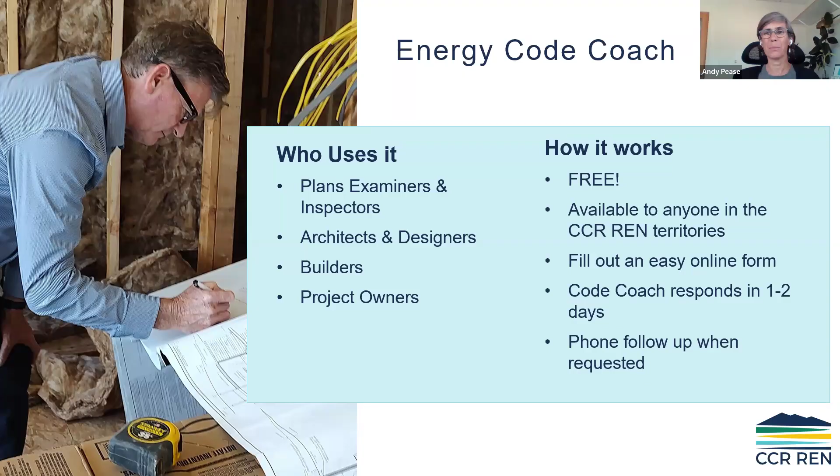Today's learning objectives are all about CALGreen, residential and non-residential. We're going to go through the whole thing in an hour and a half, covering mandatory measures, a little bit about Tier 1, Tier 2, and both submitting and reviewing compliance. Today's session is worth 1.5 learning units, either for ICC or AIA. And if you're a licensed architect looking for a zero net carbon design credit, the content of today's class will meet that requirement as well. At the end, we'll provide an email where you can request a certificate for that.

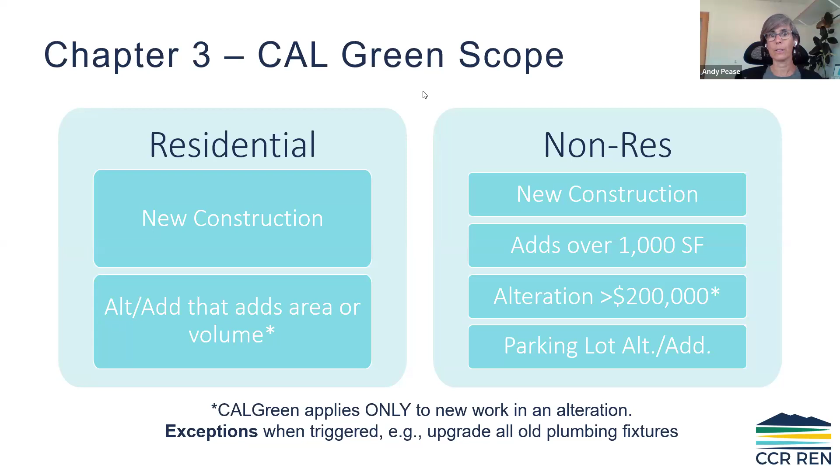And then parking lot alterations and additions will also trigger CalGreen, as we'll look at when we get to EV charging.

Also within chapter 3, in terms of scope, is this mixed occupancy. Residential needs to comply with its section, non-res with its section. So for mixed use buildings, we submit 2 checklists, one for each section. If you're doing an apartment multifamily building and there's a community room that's just for the residents, that stays within the residential scope. But if you do have a restaurant or store on the ground floor and then residential above, you'll need 2 checklists.

Same with phased projects — you need to be aware of what's in the scope of work within that project. For a shell building, the initial TI will have to follow the new construction rules. The second TI counts as an alteration, so that 1,000 square feet and $200,000 limits will apply to that.

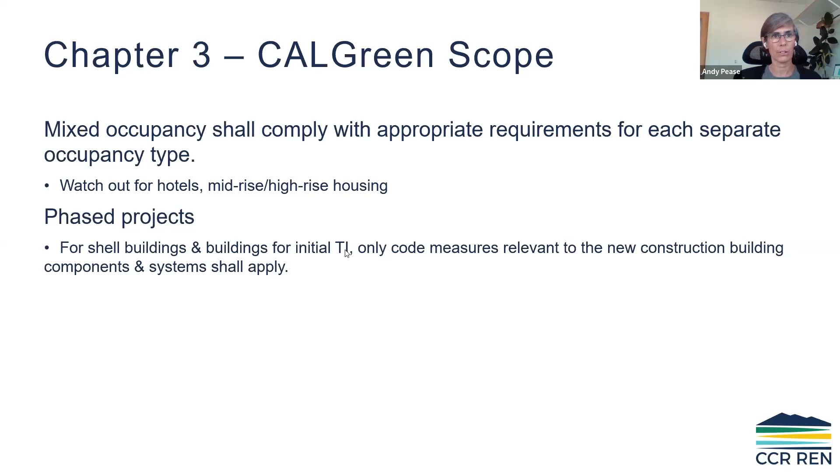The macro process of showing CALGreen compliance is that you should have a CALGreen checklist. Either you can have an Excel document that has all the code sections and that gets put onto your plan sheets, or the AIA California has this handy plan. It's a great worksheet, and they update it for every code cycle.

Now we're going to launch into mandatory measures. We're going to walk through each of these divisions: planning and design, energy, water, materials, and environmental quality. These divisions are grouped together - division 4 is for residential and 5 is non-residential. But there's so many parallels as we walk through, we're going to list them all at the same time, kind of in sequential order. We'll show the code reference section in the bottom right so you can go back and look at it yourself. And if we have notes on documentation, we'll provide those in the gray boxes.

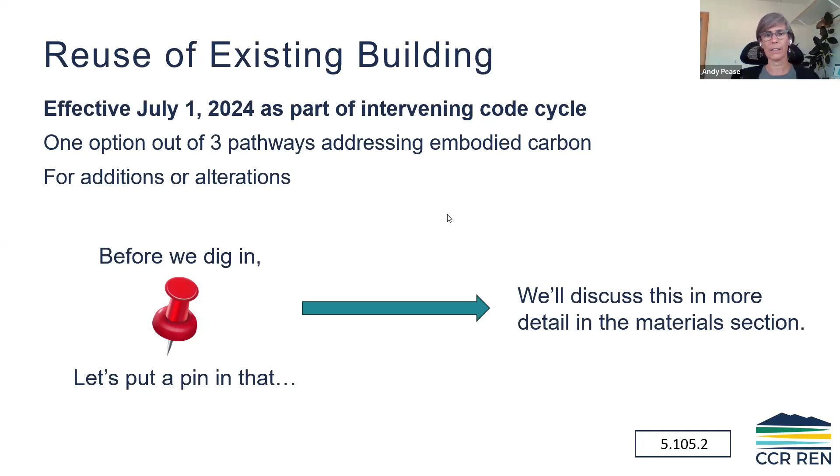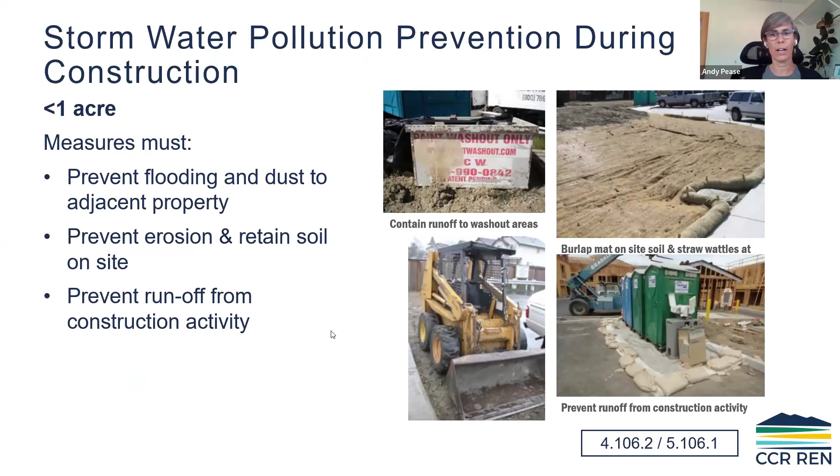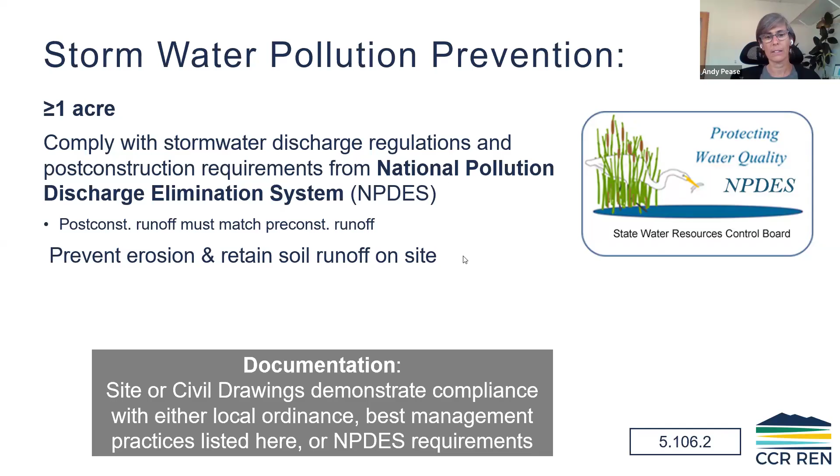Stormwater pollution prevention during construction: if it's less than an acre, CALGreen has the specific normal controls that you'd want in terms of dust and erosion and those types of strategies. So it's good to have a place to put those things. And if you're over an acre or more, then you're going into the NPDES system, which has its own rigorous program for that - making sure the site or civil drawings have either the local ordinance, the best management practices, or the requirements of the larger program.

Grading and paving - not surprisingly, we want to slope the pavement away from the building. This photo on the left shows some low impact development, which is a good strategy to manage the drainage once it's away from your building. But the mandatory part is the actual sloping away from the buildings, and that should be shown on the flat work plans. If you're not altering the site itself, then you don't have to abide by that requirement.

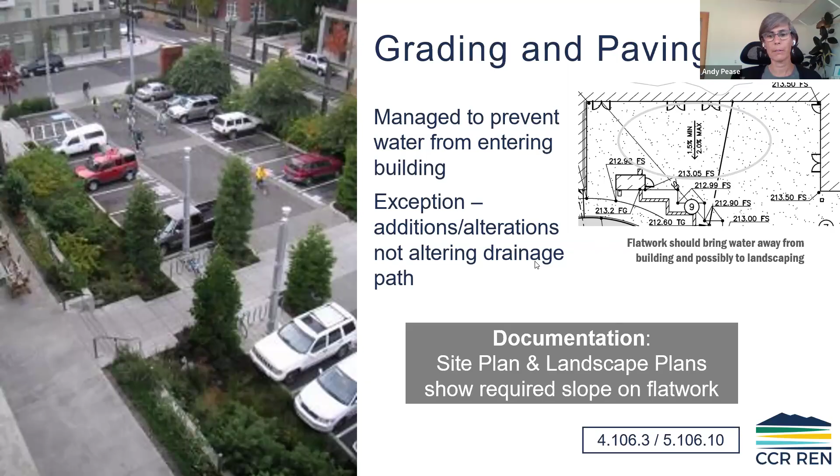Into bicycle parking - in the current code cycle 2022, bike parking only applies to non-residential projects. There's short-term bike parking: it needs permanent racks within 200 feet of the visitor's entrance. So if I'm biking to a store or office building, I want to park my bike close to the front entrance, do my shopping and be on my way. The current code has this listed in proportion to how many car parking spaces you have, which is kind of problematic - if you just have a lot with 40 cars, how many are employee or how many are visitors? We actually end up having that improved in the next code cycle.

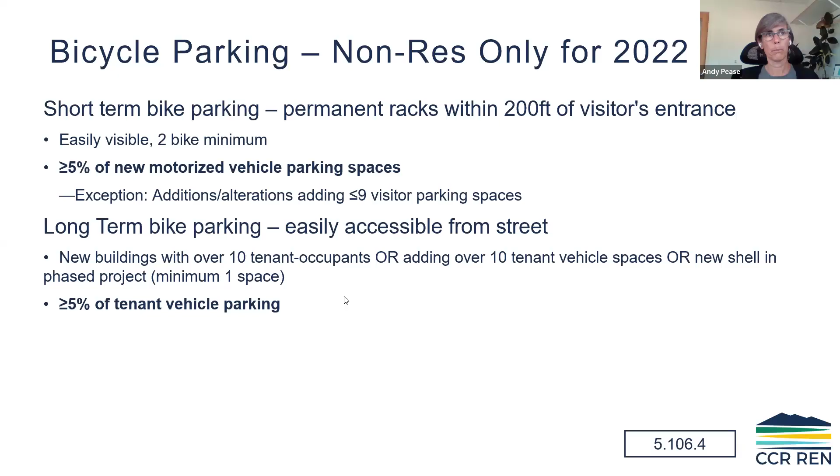So long-term bike parking, again non-res only, is related to your tenant occupants, and we're looking for long-term bicycle storage - a safe place to leave your bike for an 8-hour work shift or whatever.

Here's what's new for 2025. We'll try to highlight these as we go so that in January 2026, when this takes effect, you'll be ready. Short-term bike parking is now 20% of peak daily visitors - so however many visitors you expect at your peak, say 20 people at your store, you'll need 4 bike racks out front in a convenient way. Like long-term parking, it should be easy for employees to get there from the street without dragging bikes up a set of stairs. It's now a percentage of tenant occupants, meaning employees who will be in there. Tenant occupants could also include permanent volunteers or folks who will be there longer than a shift.

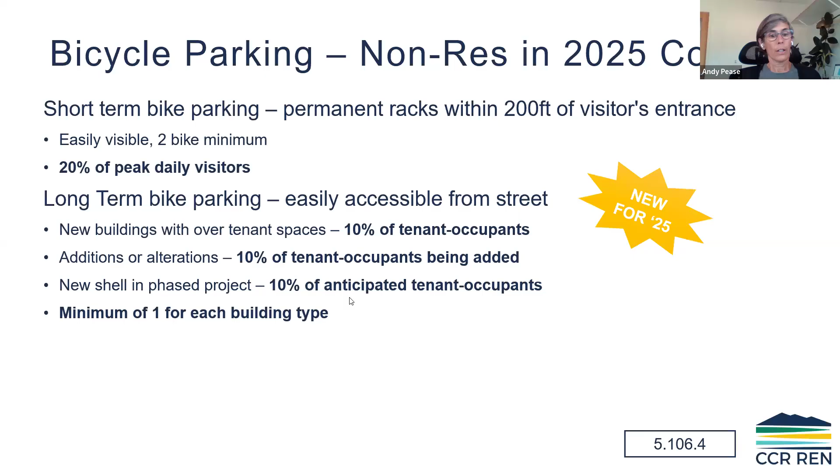And a minimum of 1 for each building type. Also new for the 2025 code cycle is residential parking, which I'm super excited about. A lot of cities have done this as an additional local requirement, so if you have multifamily housing or hotels and motels, you need visitor racks so people can bike and visit friends, or long-term biking for residents who have a bike. It's 1 bike space for every 2 dwelling units, so not a ton, but it'll make a significant difference. Hotels and motels is based on square footage with a minimum of 2 spaces.

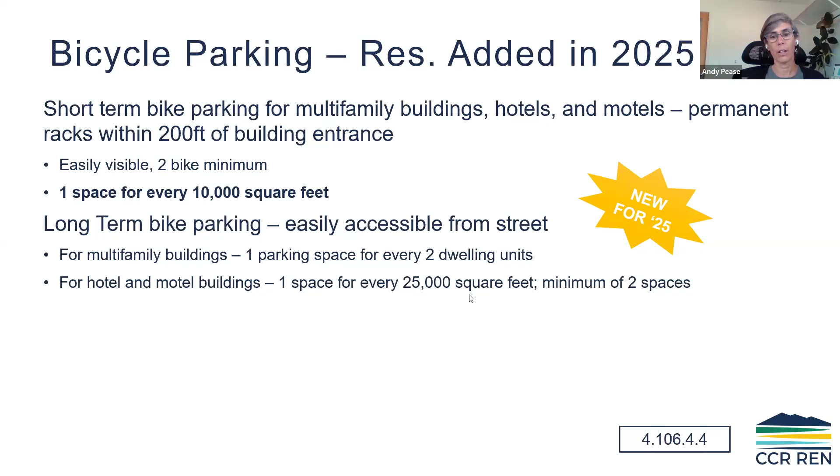Bike parking continues - that was already in place for public schools and community colleges. Overall, you should show the bike racks on your site plans, whether landscape or civil, usually both. But the calculation should be on the cover sheet so the plans examiner and building inspector are in agreement with the calculation, especially now that it's not based on a number of parking spaces. We'll make sure that's covered.

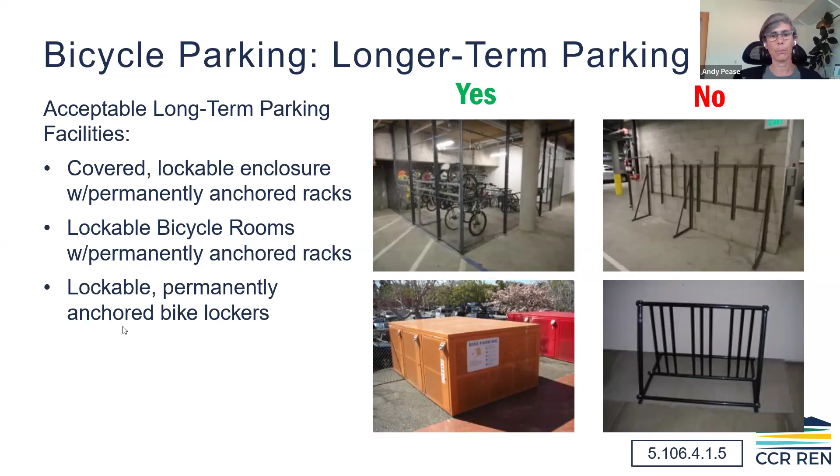So what does long-term bike parking look like? It can look like these lockers - there's a whole variety of what that looks like. You can have a bike cage in the parking structure. This one on the right is out in the open, and you'd need to clarify if it's easy to use or not. The one on the bottom right isn't acceptable because it's not mounted - it's just sitting there, so somebody could lift up the whole thing and walk off with it.

One question really quick, Andy. Sure - Eric asked how peak daily visitors are to be determined at plan review.

Great question. We use LEED certification as a model for a lot of these open-ended cases where it doesn't necessarily define things. So if it's a retail store, for example, or an office application, peak visitors might be - do we have a conference room where visitors from outside the office would be? Sometimes peak visitors is 4, for something really small like an office. Retail might have peak visitors of 40 people wandering around the store. So it's a judgment call based on the actual use being permitted. If it's a TI and it's just the shell, that's trickier - you make judgment calls, and once the TI happens, they might actually need to add bike racks to be appropriate for that. Thanks.

All right, now we're going into the electric vehicle charging section. Just in this current code cycle and upcoming in the new one, there have been a lot of changes. We're going to spend some time talking about the definitions, then the applicable requirements for single family, multifamily, non-res, and commercial heavy duty truck charging, getting ready for that, and then what applies to additions and alterations.

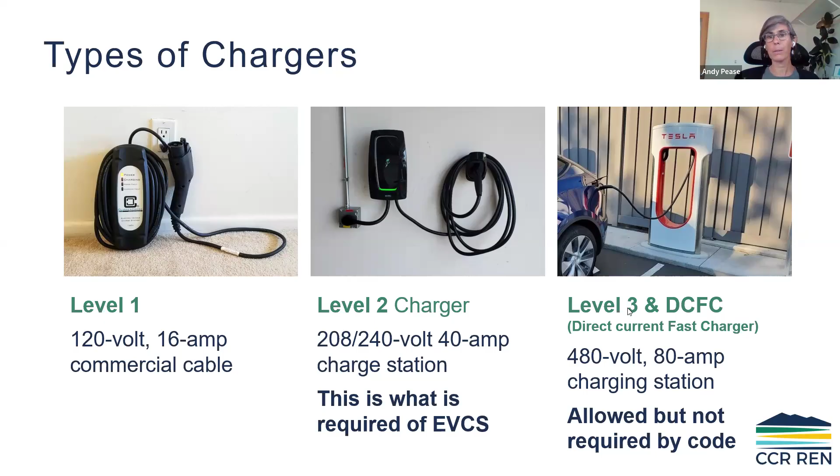Within these types of chargers, level 1 is just the little device for the car and an outlet. Level 2 charger, which is an electric vehicle charging station, meets that requirement, and it could be wall mounted or stationary. Level 3 are the direct current fast chargers, typically the Tesla type, and they're allowed, but they are not required by code at all, ever.

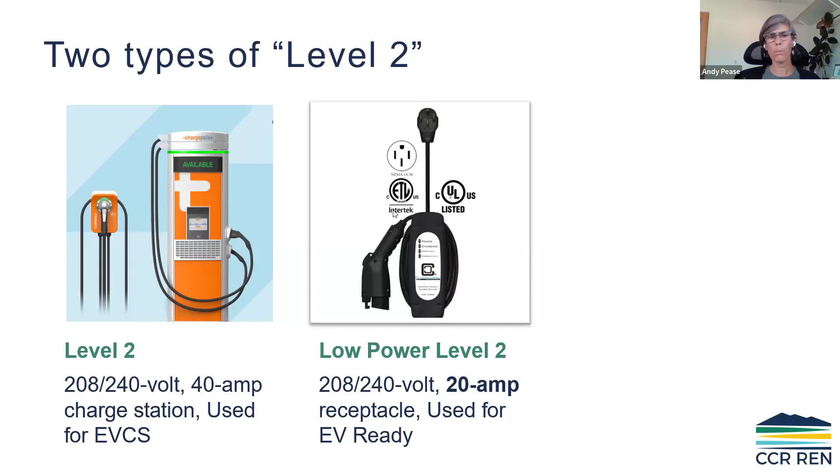So in terms of the 2 types of level 2, there's the level 2 where it's kind of like one of these ones that you might see at a supermarket that you can go and charge your car when you're on a road trip, or it could be a smaller device back at your apartment complex or something like that. But there's also a low power level 2, and that is a 20 amp, and it goes to a receptacle, which is super useful, and we're seeing it show up.

The interesting thing is that the market, capitalism, brings something new to bear for that. So there are now opportunities for even an outlet to have a cost recovery opportunity, because otherwise it's problematic if you're providing a gazillion outlets for your project and don't have a way to make people pay for that electricity.

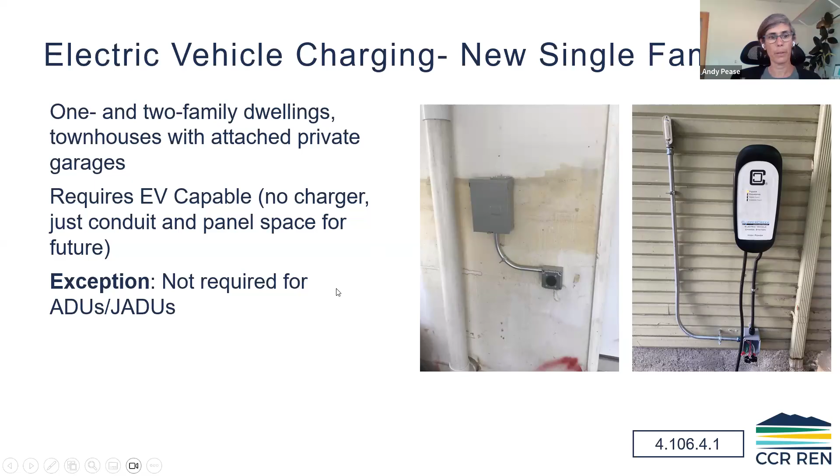So those are kind of the definitions, the scope of what we're looking at in new single family construction. If they have their own garage, then they just need to be EV capable - that's the one that just has conduit, no charger, no wiring, just electrical panel space and the conduit. ADUs and JADUs are not required to provide that, so if that's the addition or new construction, by state law they're exempt.

As a side note for the future, versus installed in a commercial setting or even in a residential setting, it's important that things have labels. So the breaker itself, the panel space should have a label, and the stub up, if you have that, should also be labeled for future EV. But don't label the parking space because there's no actual equipment there yet. And then once it's installed, you should label the parking spaces that they're for EV charging only, if that's the case.

Multifamily, hotel, motel - there's a lot of hubbub in July when the intervening code cycle really increased the requirements there. So hotel and multifamily currently require 40% of all the parking spaces to be level 2 EV charging receptacles. 40%, wow. And another 10% need to actually have level 2 EV chargers. It's a lot, but again, it's an equity thing - you have folks who are living in apartment buildings and have no way to be able to charge their electric vehicles.

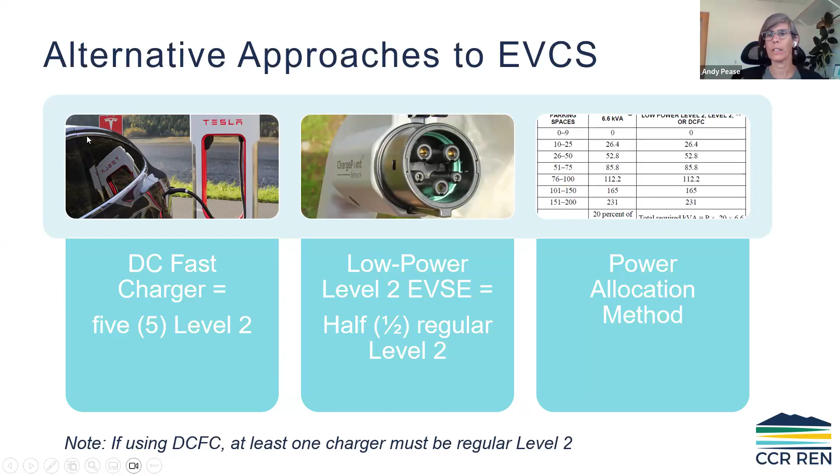You can also go slower, so you can have more spaces that are lower power, like if you just don't have the amperage, but then you need twice as many. There's also a power allocation method. I personally haven't used this yet, but it's a way where you can kind of adapt to what's emerging on the market.

Accessibility has some overlap, of course, with electric vehicle charging. So for the EV charging stations that are non-residential uses, or motels, public housing, they just comply with Chapter 11B, and there's clear language about that in terms of clear space, etc. Note that if you're putting in charging stations, at least one needs to be van accessible, but that charging station van accessible space doesn't count for the accessible space for the project overall. So you have to add additional EV accessible parking spaces.

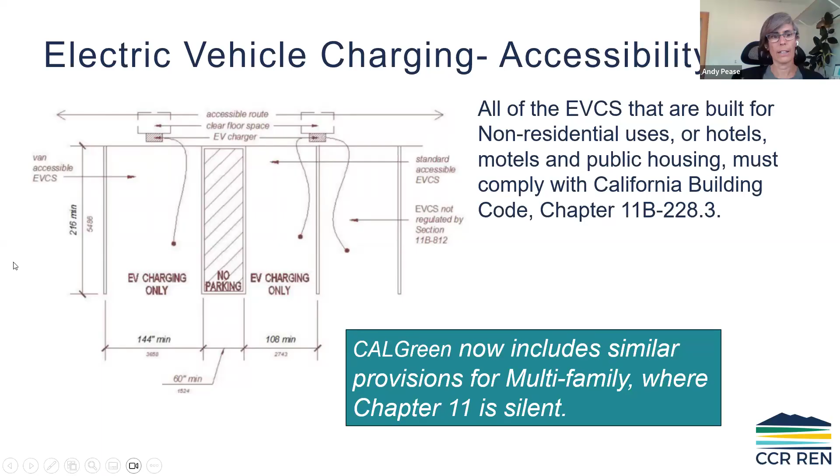In the last code cycle, they also added accessibility for multifamily. Chapter 11 is silent on that—I guess that's 11A. CalGreen now has a section that shows you need to have the 5-foot or the 8-foot aisle in between, depending on the width of the space. So similar on all of that.

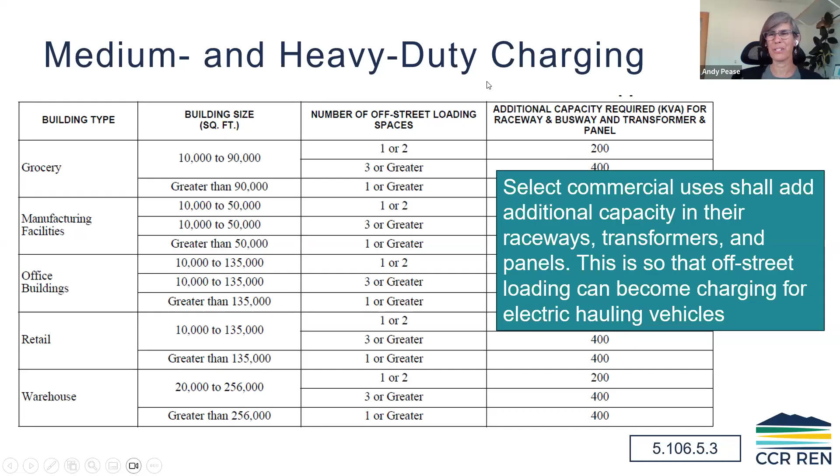All right, and then kind of wrapping up the charging section here. First, heads up that for medium and heavy duty charging, we're trying to have select commercial uses—grocery stores, manufacturing, office, retail, warehouse—depending on the size and the kind of loading spaces that are off street, need to have capacity for future charging. So it's more about making sure that you have the electricity and the raceway there, but you don't have to have the charging equipment at this time. Of course, you can kind of read the room about what we'll see in future cycles.

Charging at public schools, community colleges—they have a similar table approach, but just different numbers. And there's no changes to that in the next code cycle.

In this 2024 intervening code cycle, there was an addition for parking lot additions and alterations—maybe that was just new to the 2022 code cycle. So they figure if you're tearing up a parking lot to add lighting, or doing a major alteration to the parking lot, or a new addition to a parking lot, that would be a good time to add EV charging capacity. In the current code cycle, it's 10% of spaces that are added or altered must be EV ready. But in 2025, basically everything that's new or altered must be EV ready or EVCS—instead of 10%, it's kind of all of them, up until what would be for new construction, if it's oversized.

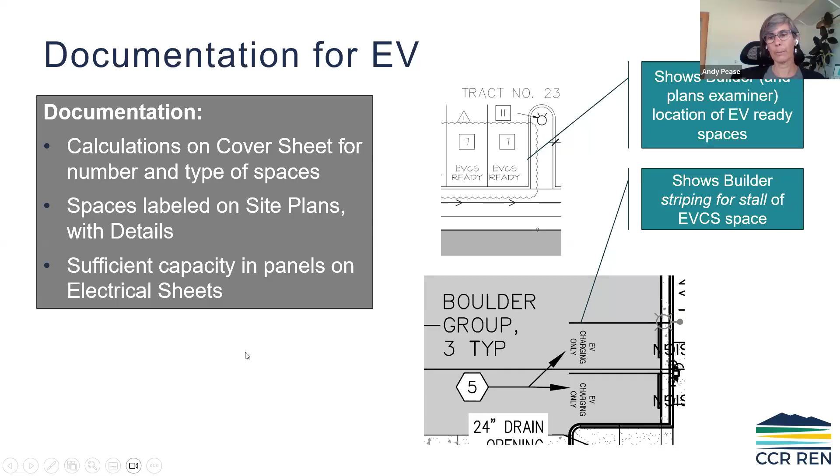And then documentation for EVs—again, we try to work with architects to make the drawings a little user-friendly, both for the jurisdiction and for the builder. So if you're showing an EVCS, this is a ready spot that you show it on here, that helps the plans examiner see what that's going to be. But if you're actually showing the striping, then that helps the builder know what the striping is. And so you should have the calculations on the cover sheet and make sure that there's alignment with the electrical plans.

All right, so how are we doing, Tatiana? We have one question, you may have answered part of it on the alteration slide. It asks: could you please re-explain when these CALGreen measures apply to a TI? For example, a retail shell TI requires updated bicycle parking per CALGreen, even though there's no change in use. What about EV charging? Will that be required for a TI, or only if the parking lot is altered?

Yeah, great question, and there is some subtlety there. For one, if it's the initial TI, that counts as new construction. What we've seen, unfortunately, is that somebody will do the building shell and say, well, we don't know what the uses are, so they don't necessarily put in the site improvements that are going to be needed. I don't think it's appropriate to let that slide so that the TI person comes in and there's no charging infrastructure. That's probably why the initial CalGreen requirement was based on the number of parking spots, because then it was tied to the actual construction of the parking versus the occupant count.

But then it was still too hard to judge whether one's an occupant or a visitor tenant occupant. So the initial TI definitely needs to have the parking improvements. After that, a TI is an alteration and should not trigger any of the other requirements for charging.

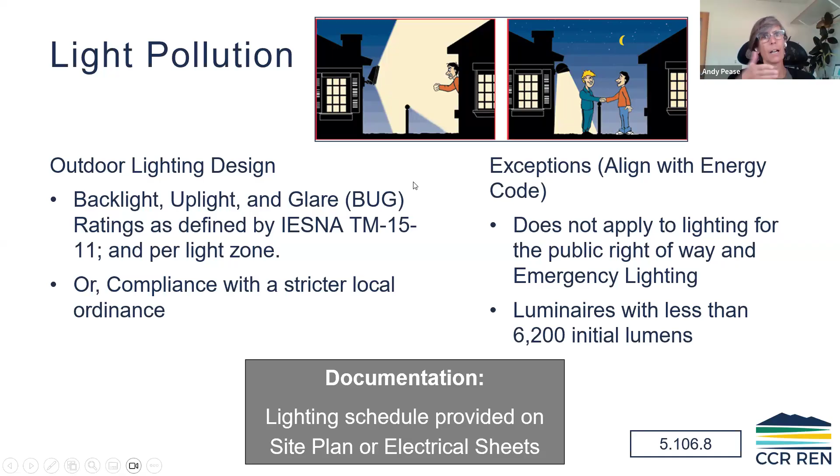And if you're working on schools, DSA has some requirements that are specific to shade trees. That covers the site planning requirements.

Okay, energy efficiency, here we go. Must comply with Title 24. That's it, really, that's all you do.

Okay, and then we get into water efficiency and conservation. I'll turn that over to Tatiana. Thanks, Andy. The requirements for fixtures and fittings are pretty straightforward.

So sometimes in mixed-use buildings, there will be a blanket 0.5 GPM faucet put in for all lavatory faucets, but that doesn't meet the minimum required for the residential spaces. So we want to make sure we're hitting that threshold where it's required.

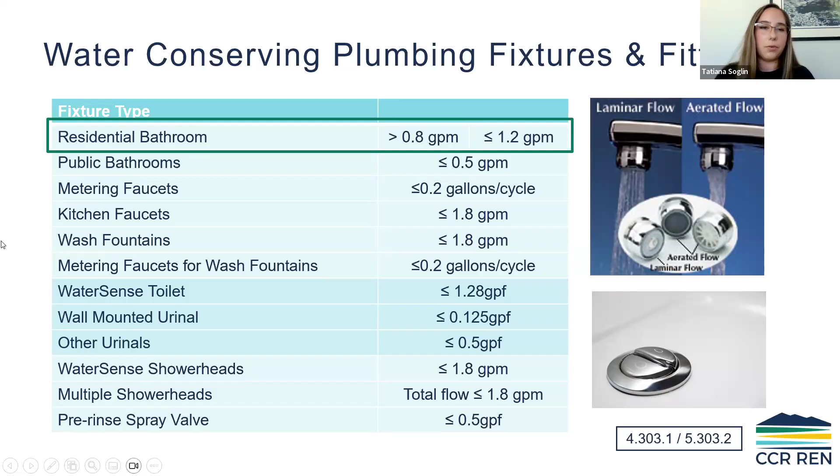There are mandatory measures related to water submeters. We put together a decision tree to help determine if submeters are required depending on the project type. For non-residential projects, a new construction project or an addition over 50,000 square feet needs a submeter if you have a use over 100 gallons per day.

If it's less than 50,000 square feet, you don't need a submeter unless it is an excessive use, which is over 1,000 gallons per day. That could be something like a building with multiple tenants where there's a use like a restaurant or a laundromat. In those cases, you'll need submeters.

For multifamily, all units must be submetered per the plumbing code, and this also includes ADUs. As a reminder, projects are considered multifamily if it's 2 units or more, so those would need separate submeters to help with accountability for water use and for billing.

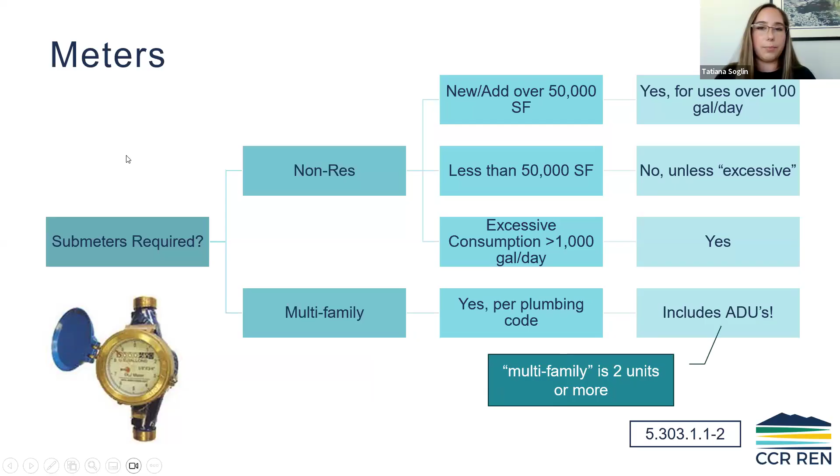Food waste disposers also have a gallons per minute maximum threshold. They must be less than 1 gallon per minute when not in use, or have an automatic shutoff after 10 minutes of inactivity, and they must be less than 8 gallons per minute when in use. All this will need to be included in the plumbing fixture schedule.

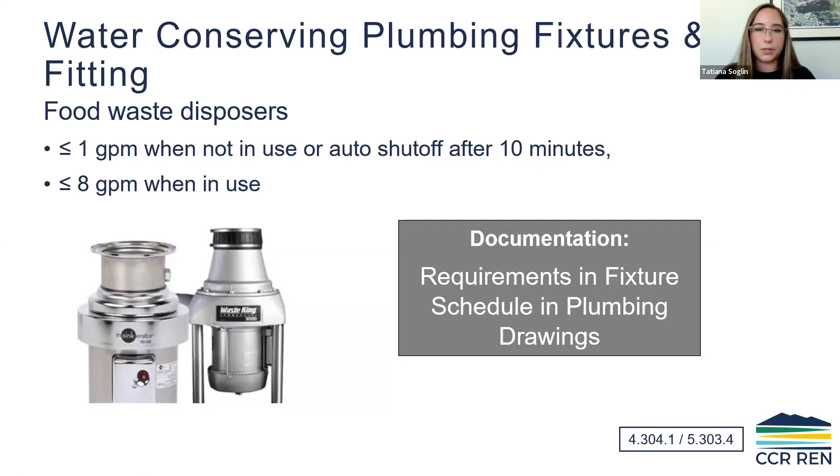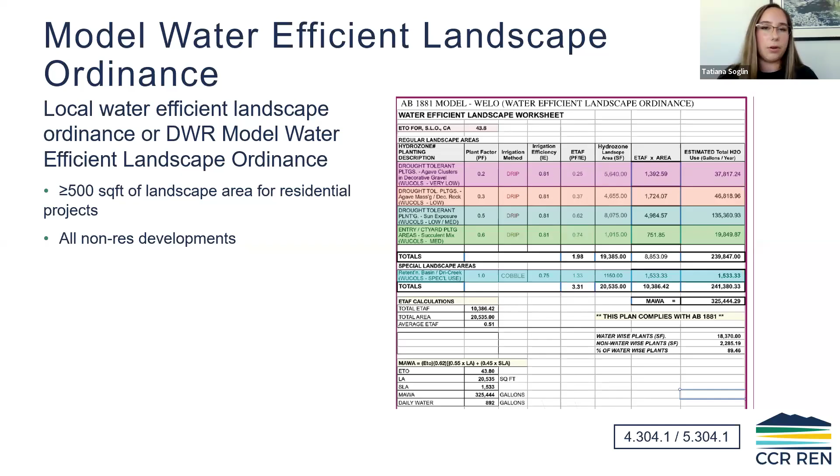For special uses, MWELO is required for public schools and community colleges where there's 500 square feet of newly constructed landscape projects or 2,500 square feet of rehabilitated landscape projects, and healthcare facilities must comply as well.

And now I think I'm passing it back to Andy for materials. All right, so we'll start in on the materials section here. Some of these are, anyway, but I'll touch on them so we can all point to the same thing about what is required.

So in general, we're doing a lot of air sealing, but CALGreen does have specific requirements about rodent proofing. One thing that's important here is that within the rodent proofing, you seal all the penetrations with some material that's not foam. The foam falls apart, gets chewed up. It needs to be cementitious concrete or metal or something like that to keep the critters out.

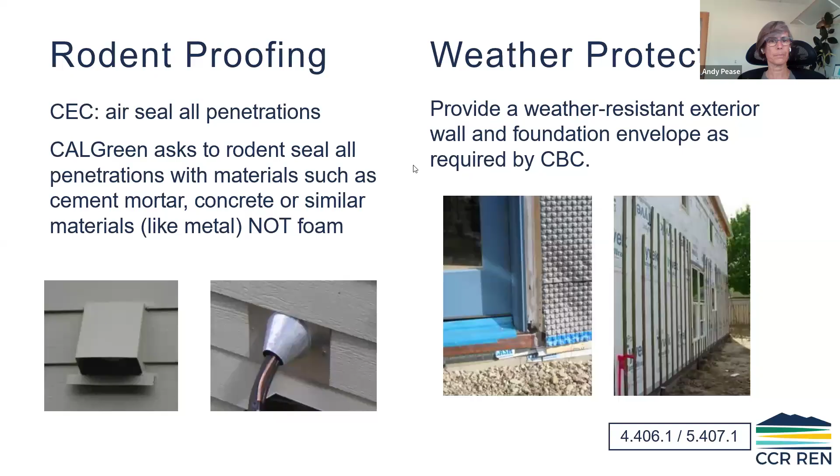And then the weather protection as required by the CBC. And then moisture control, again kind of obvious, don't have sprinklers going onto the buildings. That's not allowed.

This one we're still finding folks not picking up on it, but it's getting a little bit better - if you have an exterior entry, you need ways to keep the water out. There needs to be some overhangs at the exterior entries, or a recess, or some way that any kind of driving rain is not getting into the building itself, and you want non-absorbent flooring within those first couple of feet. Just think of those materials getting wet and then rotting and molding and things that are unhealthy.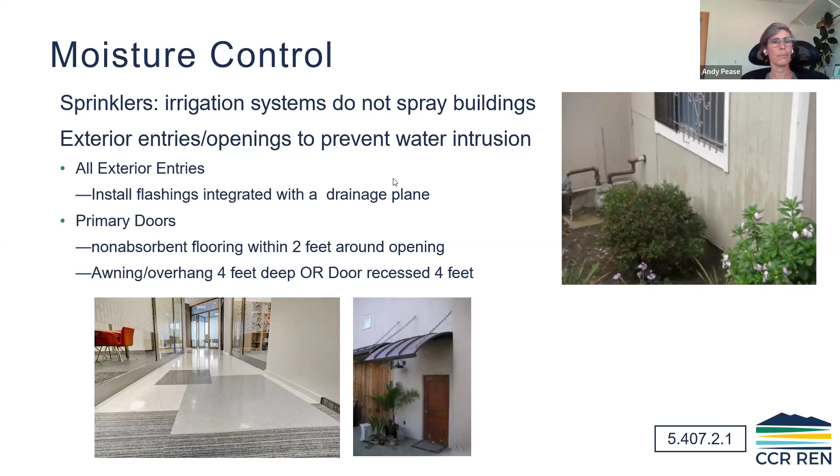Within construction waste management, we want to have minimum waste diversion of 65%. It had been steadily increasing the percent diversion, but it's kind of holding at 65%. We've been challenged in terms of waste diversion for the materials and the markets of those products.

So hazardous waste is excluded from that - 100% of that needs to be disposed of someplace else. So it's just the remaining amounts, and that requires a construction waste management diversion plan, waste management plan, and a statement of the results. So you can ask for those as you go.

There's also an optional pathway where you can actually reduce the generation in pounds per square feet of waste, which varies residential to non-residential. This is tough to do, but if you are doing offsite panel prefab kind of construction, that would probably be an appropriate approach because there is a lot less on-site waste for that approach.

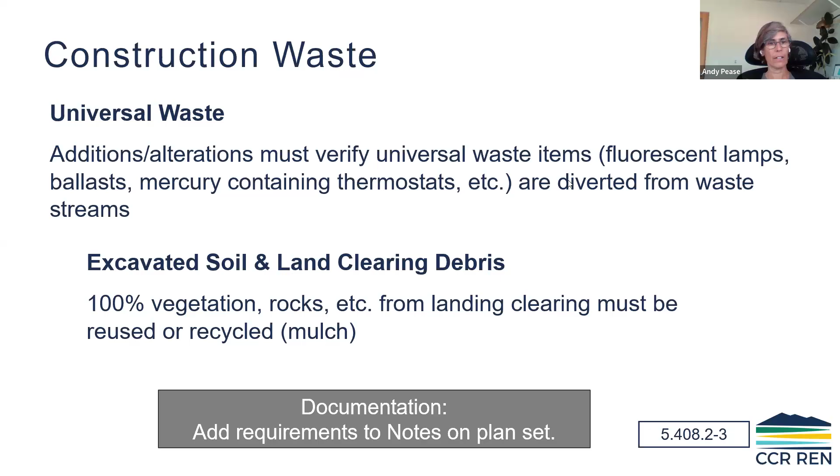For additions and alterations, there needs to be a plan for what they call universal waste - fluorescent lamps, ballast, anything that contains mercury. Any of those kinds of regular household materials that are not going to be needed on site. As a reminder, soil and land clearing debris should never go into the landfill in the first place. If there's vegetation, it should be recycled as mulch. Make sure those requirements are all on the plans and verified in terms of waste management plans.

Okay, embodied carbon. Woohoo!

Before we get into that, a question just came in about waste management: are agency construction projects subject to waste management plans, or only projects with construction or demolition permits?

I'm not sure I understand agency and construction. I guess I would say that it's projects that require a construction permit or a demolition permit. So it's kind of - yeah, construction waste diversion. Does that help? If somebody needs to maybe unmute and let us know.

I'm not sure. Hi, yes, thank you. I was just considering the city's pavement rehabilitation projects, or if we are doing a park improvement project where there might be construction debris, but we're not taking out a permit or anything like that. Do we need to require that in our specs?

Yeah, no, I think that's required for that kind of construction, because if the private sector would be requiring a permit for tearing up a street, even though it's an internal construction permit, it would still need to comply with code.

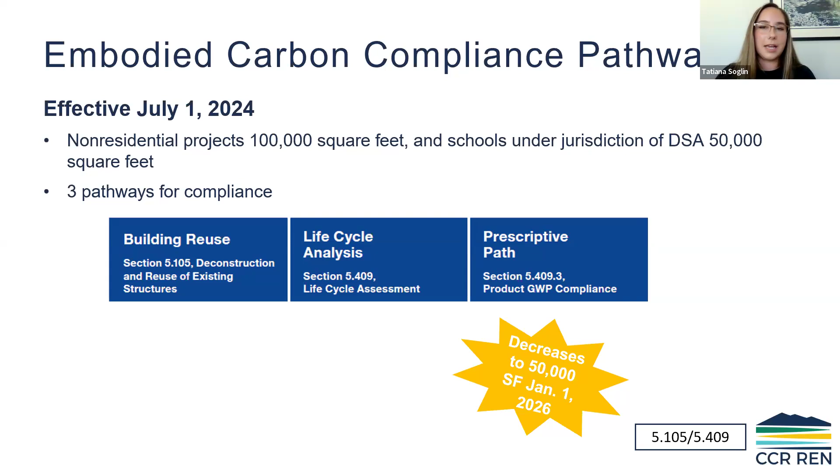So there are 3 pathways to compliance, and we'll briefly walk you through these: building reuse, life cycle analysis, and the prescriptive pathway. To understand each option, we need to know what embodied carbon is, where embodied carbon shows up in the construction process, and the scope for looking at each of those pathways.

Embodied carbon refers to the greenhouse gas emissions coming from the manufacturing, transportation, installation, maintenance, and disposal of building materials. We don't want to get this confused with operational carbon, which is related to greenhouse gas emissions due to building energy consumption - that's the type of carbon emissions you're probably more used to hearing about.

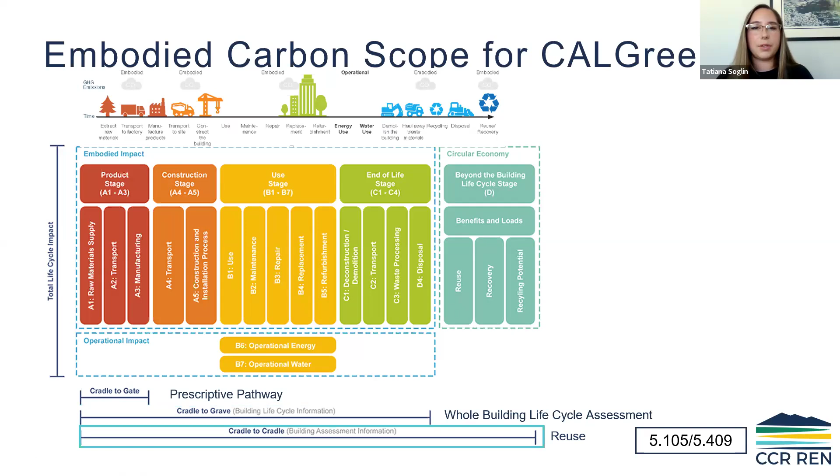The next is cradle to grave. This includes the product stage, but also construction, use, and end of life stages. This is the scope included in the whole building life cycle assessment. Last is cradle to cradle, which includes the whole cradle to grave scope, but additionally includes beyond the building life cycle, things like recycling and reuse - that's where the building reuse pathway comes into play.

Looking at a more detailed overview, we have our building reuse options for additions, where the addition is less than 2 times the area of the existing building. The mandatory measure for CALGreen requires 45% of the structure and enclosure to be reused.

Next is the whole building life cycle analysis. This is a modeling pathway where you'll need to show a 10% reduction in the embodied carbon from a baseline building. And last is the prescriptive pathway, which targets carbon reductions in specific materials.

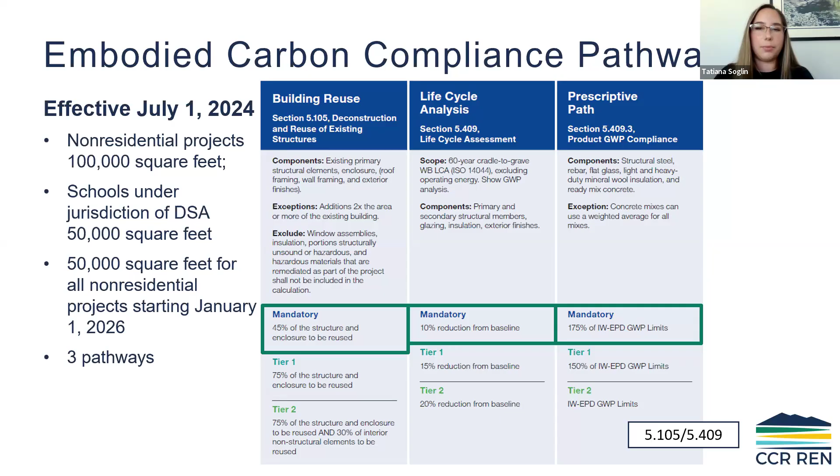For the mandatory measure, this limits the global warming potential to 175% of the industry-wide average. We'll find those values on the environmental product declarations, or EPDs.

So for this example, we're retaining 54.57%. And as a reminder, the total percentage needs to exceed 45%. So this project is complying.

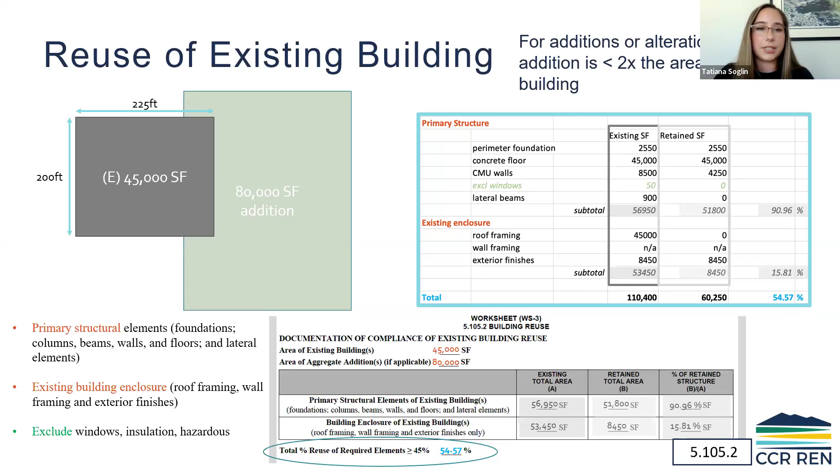For the second method, we have the whole building life cycle assessment. To do this, you'll need to build a model very similar to an energy model, but instead of measuring energy usage, it measures embodied carbon. This one looks at the cradle to grave scope over a reference study period of 60 years. You're looking at the same materials as the building reuse method, except this time including glazing and insulation.

A lot of people ask how to generate a baseline to compare your designed building to. The reference building, or baseline building, should have the same location, orientation, size, function, and space conditioning as the proposed, so that we're ensuring we're just comparing the materials. And the materials for the baseline should be based off of what a typical building design for a project of that type in that location would have.

We've listed some tools below here. Athena and One-Click LCA are free tools. There are paid software options as well, such as Sphera, SimaPro, and Tally. Tally in particular has a Revit plugin, so if you have a good Revit model already built, it can be imported into that program so that another model doesn't have to be completely built from scratch.

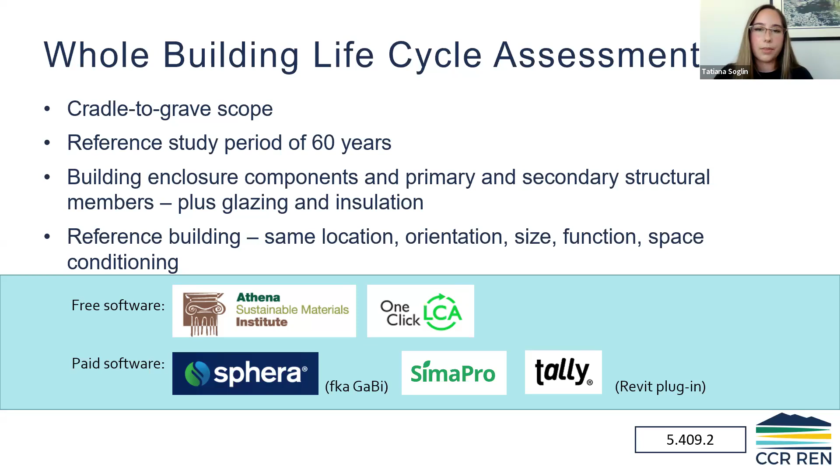This is just a quick example of what a project looks like in Athena. It's a typical trunk and branch structure. If you're familiar with energy models, it looks very similar. You'll go through and describe building assemblies through dialog boxes that request simple information like bay sizes and loads, and the software will do the rest for you. It calculates a bill of materials and the associated environmental impacts.

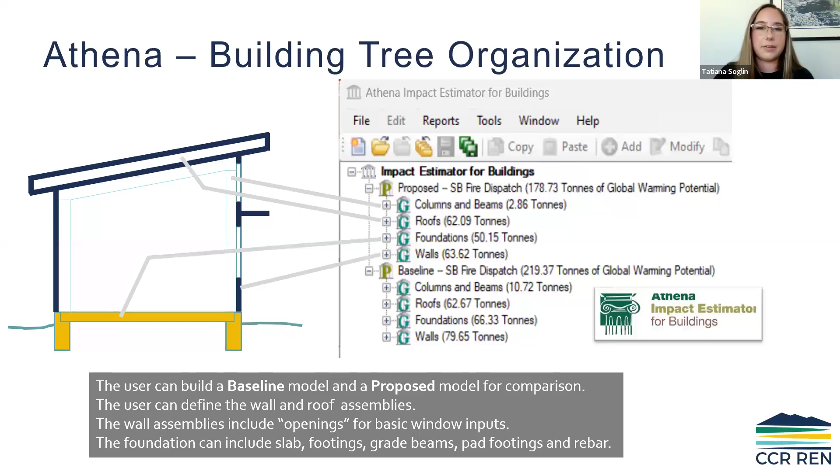Users also have the flexibility to add materials as needed, or you can import your own bill of materials from any CAD program. And CALGreen also provides a worksheet for this method where you would then input the values that come out of the assessment to display compliance.

The last of the 3 pathways for embodied carbon is the prescriptive path. This method has a much more limited scope, targeting some of the higher impact materials as determined by the Buy Clean California program, like certain types of steel, glass, and insulation, and of course, concrete.

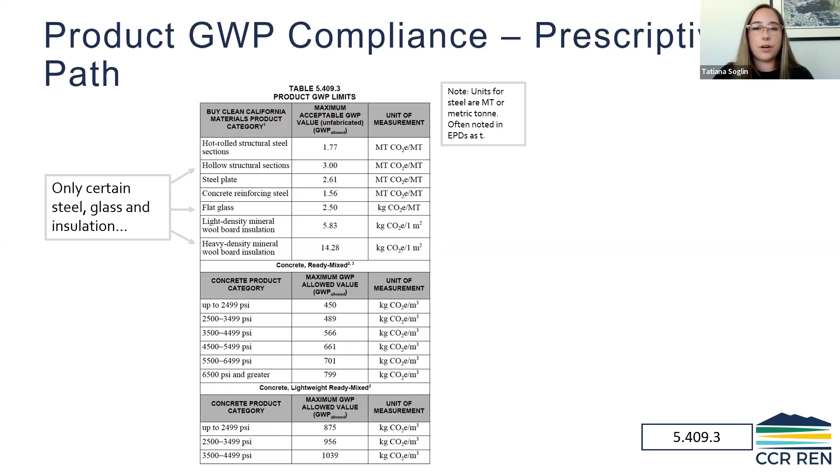This table shows you the maximum acceptable global warming potential, or GWP, which was based off of industry-wide averages. For the products on the top half of the chart, you just need to find products with a GWP below what is allowed. And for concrete on the bottom half, compliance is determined by a weighted calculation.

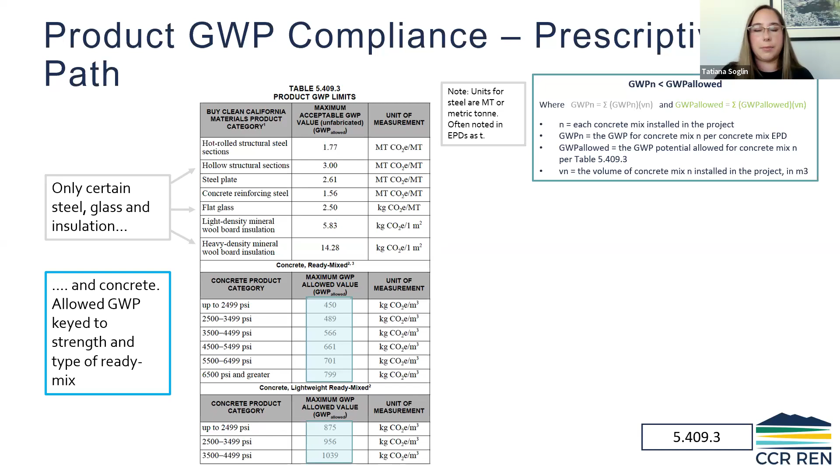Each type of concrete has a different allowed GWP value and will have a different actual GWP. To determine compliance, you follow this equation: multiply each actual GWP with the volume used, and add those together to get the total carbon impact, then do the same for the GWP allowed. You'll just want to make sure the actual GWP value is lower than the allowed.

Product data for each material can be found on environmental product declarations, or EPDs. This is an example of where you can find it. You can see the GWP values right at the top in that first row.

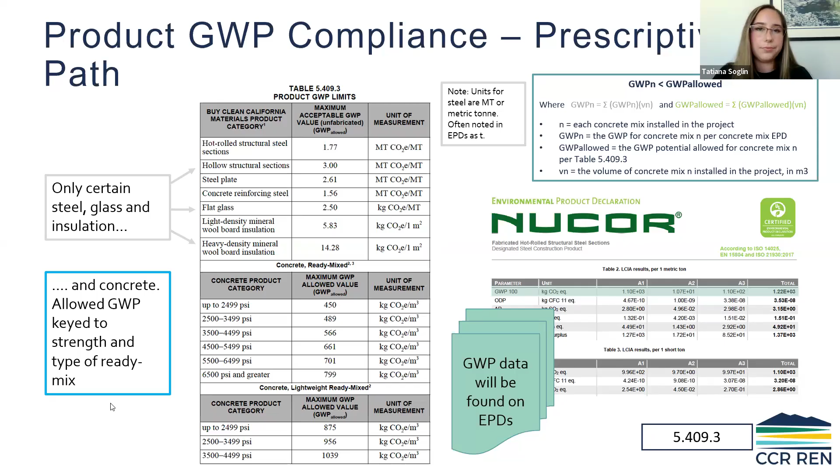So that's kind of just a very, very quick overview of the 3 methods.

Realistically, right now, most of us are not working on 100,000 square foot buildings where the requirement is being triggered by code. But as we mentioned earlier, the square footage threshold will be reduced to 50,000 square feet in January of 2026, and over time we can expect it to become more relevant to a wider variety of projects. So we want to start thinking about strategies addressing embodied carbon now, so that when it's required for projects you're working on, you're already more familiar with it.

This slide has a lot of words. I'm not going to go super into depth into each one, but here we're calling out some of the high impact material categories for cost-effective low carbon product selection. Generally speaking, concrete and steel are typically the places many projects find to be great areas for potential embodied carbon reduction at no or low cost premium. This could be through using alternative cementitious material for concrete, or steel with high recycled content. There are also opportunities in insulation, glazing, and finish materials.

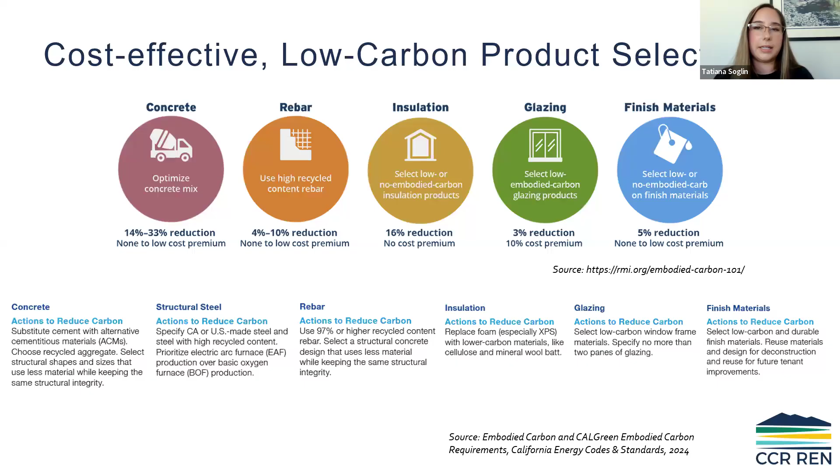This slide displays the embodied carbon of some different insulation materials. Some shown are more net carbon emitting, and others are net carbon sequestering. Not all insulation material works for all conditions, of course, but where a substitution is feasible, charts like this can act as a guide to select alternative products.

Foam materials tend to be pretty common and are among the highest in carbon emissions. Mineral wool is still net emitting, though lower than foam, and fiberglass batts are a bit lower. Then switching to non-petroleum products such as cellulose, hempcrete, and straw bale can move more towards sequestering carbon instead of net emitting. We have some photos here to the right of expanded cork, wood fiberboard like Gutex, and even emergent technologies like mycelium board, which is made out of mushrooms.

We can see there's a lot of insulation options and a lot of emerging technologies as well, so keep your eyes out for more coming on that.

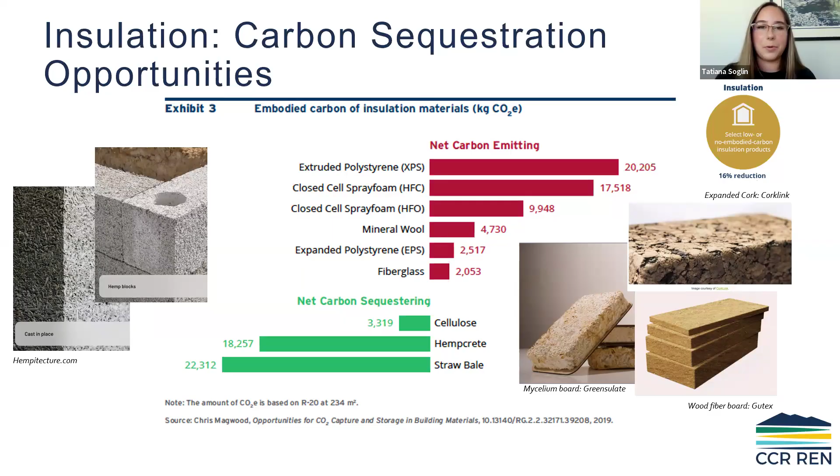And then also within the materials section is thinking about the operations and maintenance of a building, that's also impactful for the health, wellness and durability of a building.

Within the code section is about providing the building owner representative with an owner's manual. It can be an online cloud-based manual, covering everything from how to operate your dishwasher to the warranties that come with it. But there are also specific chapters required for testing of systems, suggestions for energy savings, and a maintenance schedule appropriate for that particular construction system.

In 2022, they added that the maintenance manual, the O&M manual, should have a section about defensible space, again thinking about fire sensitivity there. Within the non-residential setting, a commissioning process could be helpful as well. We've seen building departments actually require the first draft of the O&M manual as part of their permit requirement, or a building inspector can ask for it at the end. Again, it can be a physical thing or a cloud-based location.

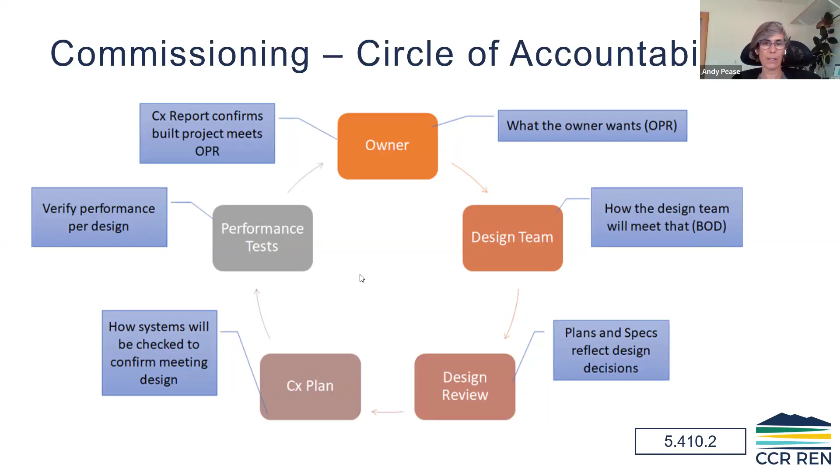And then at the end of the whole project, the commissioning authority provides a report to the owner - did bringing all of those pieces together meet the owner project requirements in the first place? So it's an important process, and California requires it because they see that it works. It improves efficiency, comfort, health, and safety. That full process is required for non-residential buildings of 10,000 square feet or more. Storage buildings don't trigger it, but pretty much everything else does.

In terms of those pieces we just went over - the OPR, the BOD, and the commissioning plan - those are all part of the permit process, so they should come in as part of the permitting. And then in the field is the functional performance testing and the documentation. There's a requirement for training of the building staff or whoever is going to maintain the building. And then there should be a commissioning report at the end.

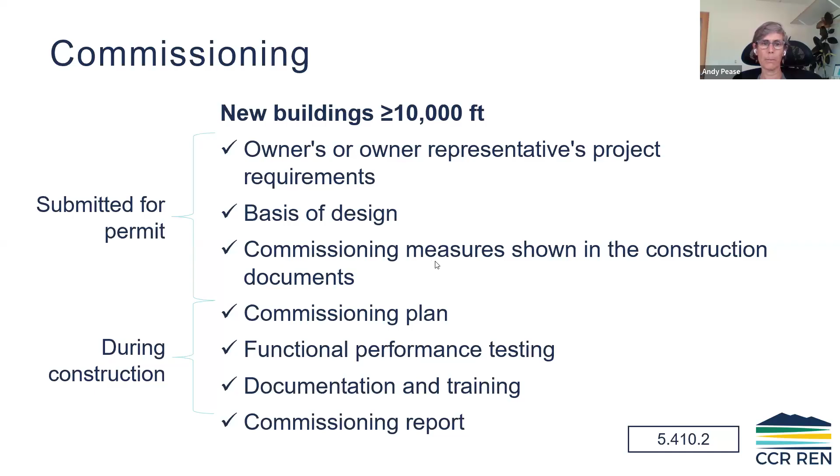There's a commissioning form that's in the energy code. CALGreen has some sample documents that you're allowed to use, and the energy code also has this document. These two codes come together almost entirely, so what's in the energy code mostly covers CALGreen, but there are a couple of key differences to watch out for. If you're using this form, you can use it to create the BOD, OPR, commissioning plan documents, or we usually just generate them in Word format and attach them as part of the PDF submittal, and that's allowed as well.

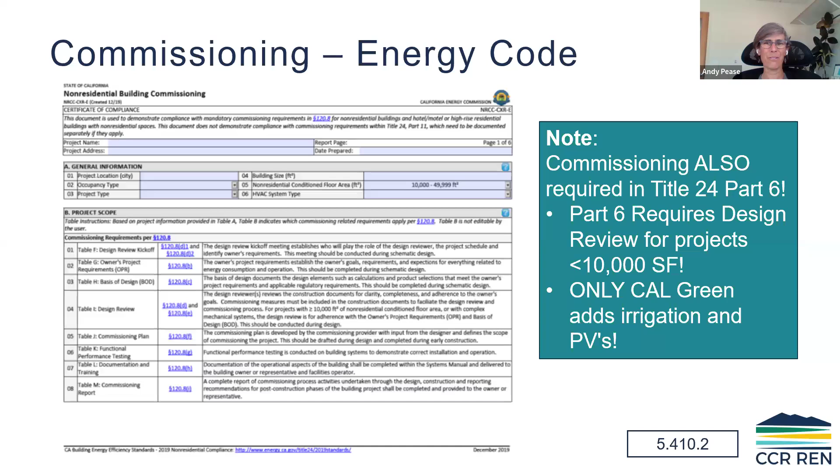It's important to note that the energy code also requires design review for projects under 10,000 square feet. So there's a design review process for CALGreen energy code for over 10,000 square feet, but if it's less than that, CALGreen or the energy code requires that design review. It can be done by the architect in-house, but there is a checklist you have to go through. Also, CALGreen has a requirement that adds irrigation and renewable energy as part of the commissioning process. If you're doing LEED certification on a project, thankfully all of this will be covered as a prerequisite, but otherwise you have to watch out for all those parts and pieces.

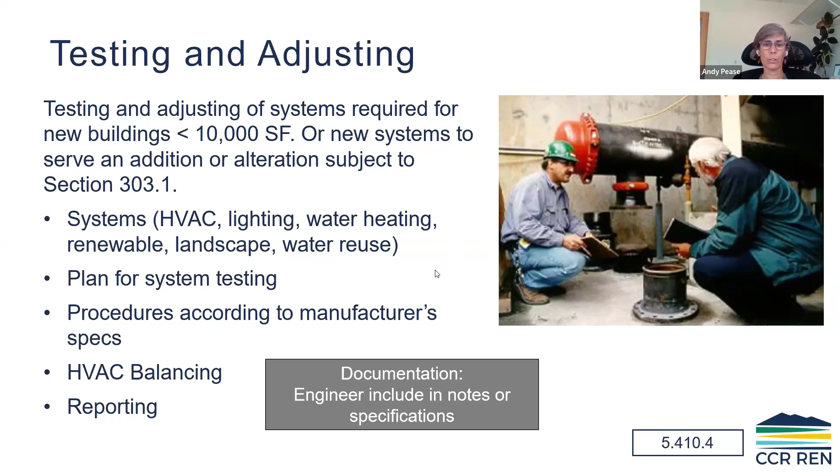Within CALGreen, for projects under 10,000 square feet, there is a requirement for a testing and adjusting plan. That's usually going to be the mechanical and electrical engineers describing that system for testing and adjusting, for those systems that use energy, balancing, reporting, and all of that. So make sure those are included in the notes or the specifications.

So that was the materials section. Any other questions on materials before we go to environmental quality? No? All right, keep going.

One question just came in: when is third-party review required? Great question. So it's for projects that are either very large or complex.

50,000 square feet is considered a very large building, and a complex mechanical system is anything more than a packaged HVAC system. In theory, we haven't found a precise definition that's relevant in terms of complex systems, but definitely by size. Then there's a bit of a judgment call about what complex mechanical system would require a third party review. Otherwise, it can be a review within the organization by somebody who is not directly involved in the project.

And if you want more information, let us know. We can dig into that section a little bit.

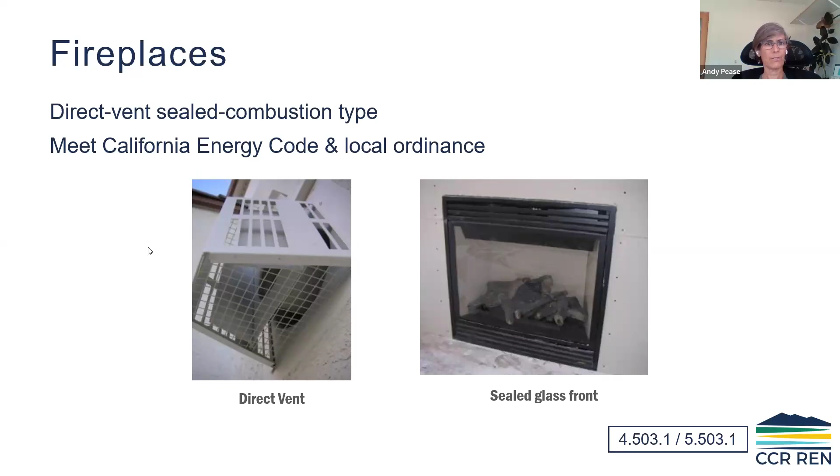Okay, so environmental quality. Again, this is one of those... fireplaces don't have open combustion.

Within ventilation, current code says if you're operating a mechanical system during construction, you can use a MERV 8 filter. So if you're installing the carpet and you want the space conditioned with heating or cooling during that process, you can just put in a MERV 8 and then replace the filters prior to occupancy.

And then permanent ventilation must be MERV 13, so supply and return. Starting in the next code cycle, temporary air filters must also be MERV 13. Kind of makes sense, right? I think they were pacing themselves when MERV 13 came into effect as a requirement.

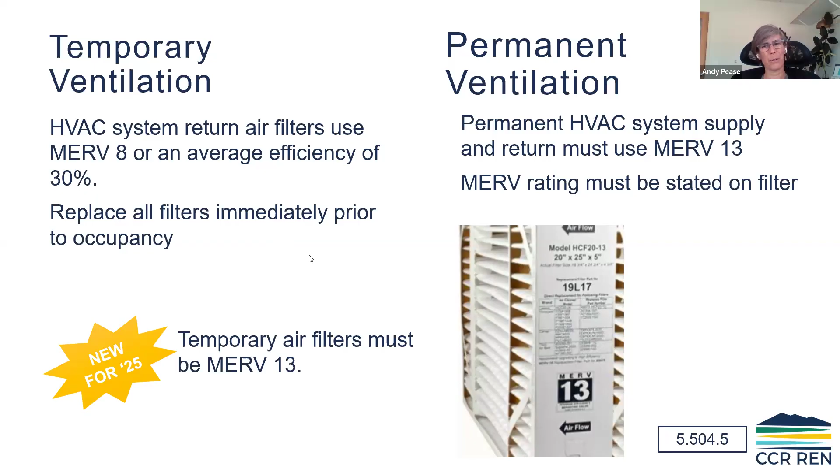So what we're seeing works pretty well - it's often blue that they cover the ducts. Ideally, the ducts will come onto site all wrapped up and ready to go. Then they do the install work, then cover them up again at the end of the day.

The equipment itself should be covered up until it is actually operational. So keep those covered. If by chance they aren't covered, it's not the end of the world - they can do proper cleaning protocols. So it's not like they have to rip them out, or that you're stuck if you're doing the inspection. You can require them to be cleaned and then covered.

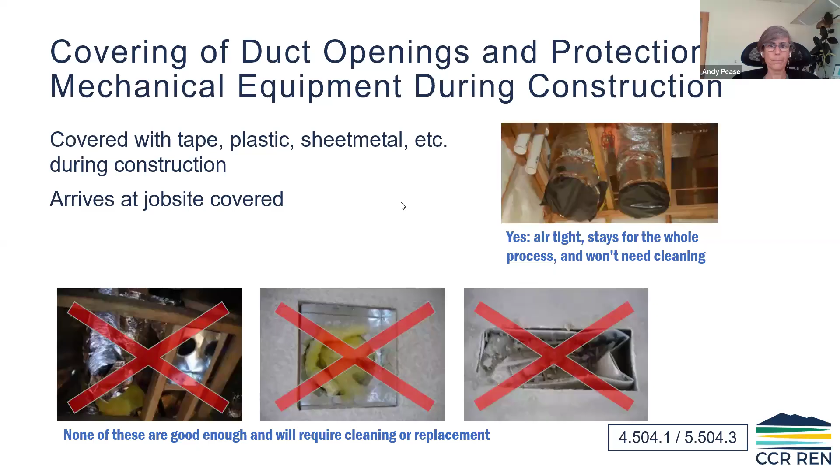Pollutant control is one of those original categories that's been in CALGreen since the beginning, and these were the original categories: adhesives, sealants, and caulks, carpet adhesive, carpet pads, resilient flooring - whether it's linoleum or vinyl flooring, paints and coatings, shellac, actual paint, any of those varnished products, and then composite wood, so MDF, plywood, those types of things. There's a long list in CALGreen that talks about the volatile organic compound limits for each of those products and adhesives, or for composite wood, it's about the urea formaldehyde and having below a certain threshold there.

Those numbers haven't changed for at least a decade in terms of the thresholds, so the market is pretty solid. I'd say we get great compliance on this, and it feels redundant to ask for spec sheets because everything generally complies. The times we've gotten dinged is when somebody uses an outdoor product for an indoor application, so it's still worth checking. With carpet, we had a problem with someone using a really heavy duty adhesive just to tack the edges. They were able to show a budget, using very little of it, but it was higher than the threshold, while the other products were way below, so it was still compliant through an alternative compliance path.

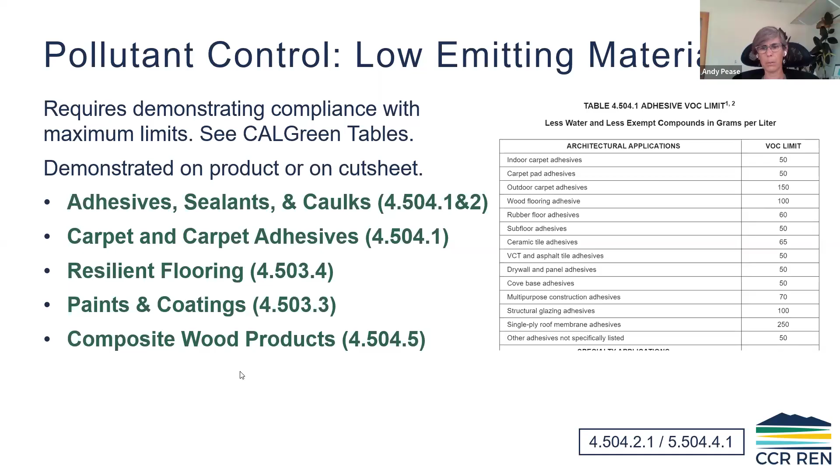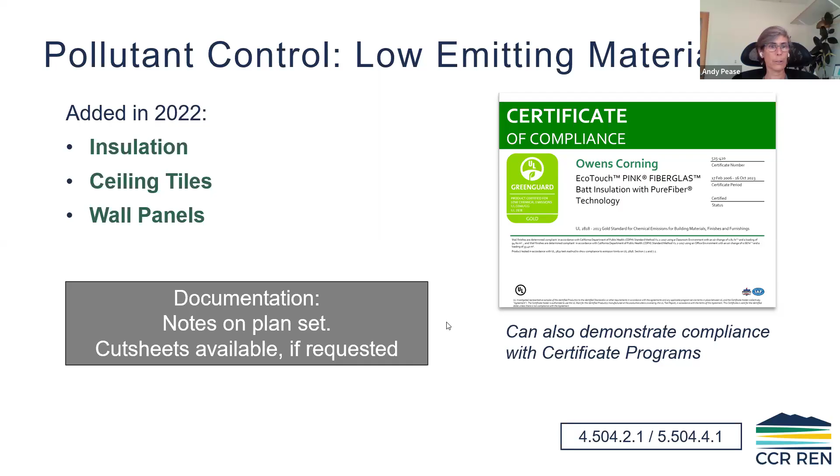This current code cycle added three more categories: insulation, ceiling tiles, and wall panels. You can look for a spec sheet or certificate of compliance showing one of these certifications—GREENGUARD is one of those systems, and the Carpet and Rug Institute has some thresholds too. These certificate programs are another way to demonstrate compliance rather than sifting through every individual line item and definition. The notes should be on the plans as part of CALGreen compliance, but inspectors can always ask for cut sheets and verification that's required to be available.

Tobacco and smoking are still prohibited. It's surprising how many signage options are non-compliant. Some say 20 feet from the building—then we ask, should it be 25? Or 'this establishment is smoke free'—not specific enough. Is that indoor or outdoor? One says no smoking within 25 feet of all building entrances—that could work, but the most thorough version, using the actual code language, is no smoking within 25 feet of doorways, operable windows, or vents. If there aren't any operable windows or vents, the middle option works, but otherwise this is more thorough. It can seem silly, but visitors from outside the area, or people who just stand outside the door, will smoke—and vaping counts as smoking in this scenario too.

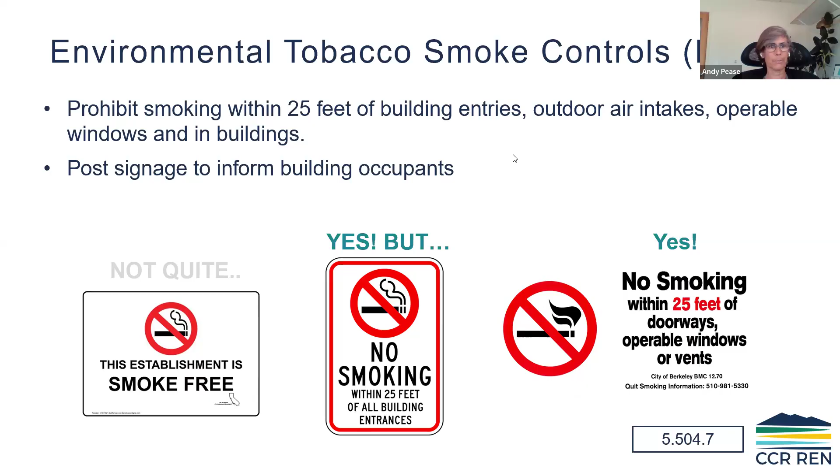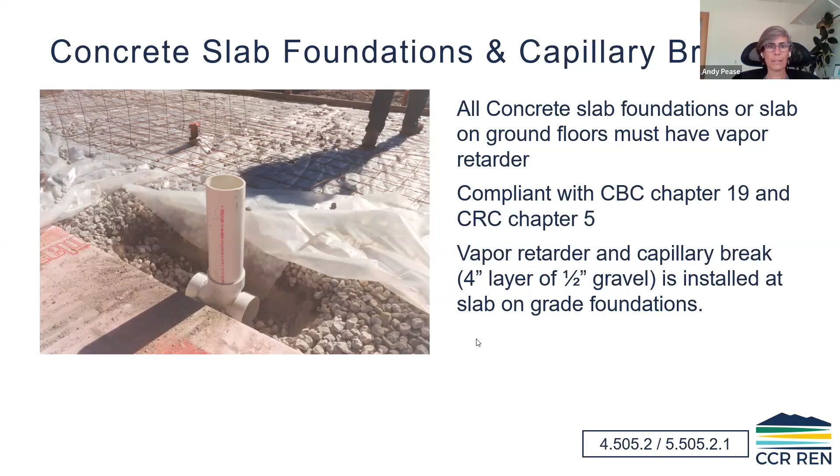There are some other requirements specific to vapor retarders—air sealing, capillary breaks for concrete—making sure there's inspection for those pieces now. Here's an example of a slab with the vapor retarder or capillary breaks. So making sure you have the plastic, with all the seams taped up to the edges—this is an important way to achieve air sealing and stop moisture from getting into the building.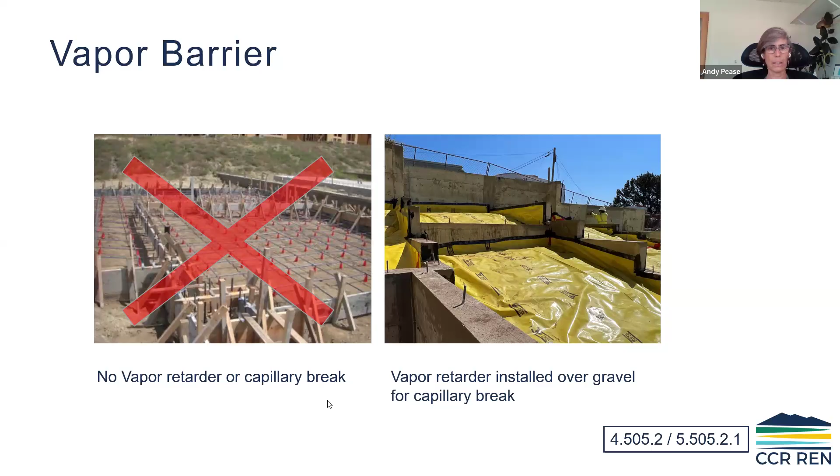In bathrooms—meaning a tub or shower room, not a half bath—you need to have an exhaust fan, and it needs to be ducted to the exterior. It needs to be compliant with Energy Star, at least while we still have Energy Star, and it needs to be controlled by a humidistat.

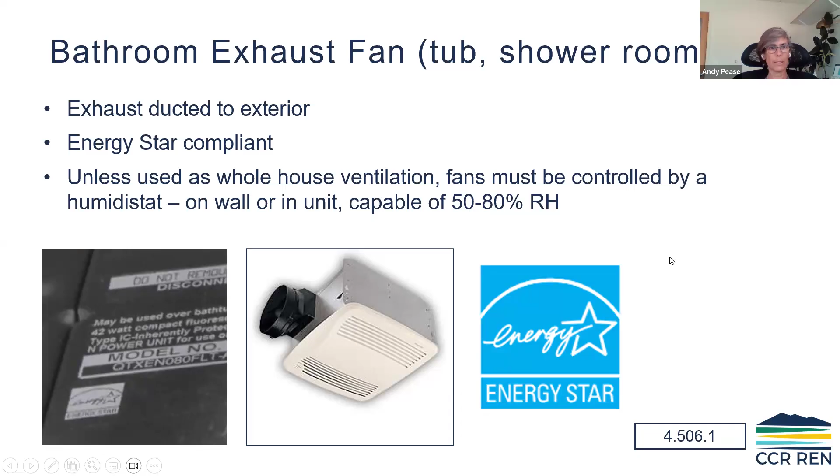Heating and air conditioning system design: there are ACCA Manuals J, D, and S. If you're doing an engineered ASHRAE design, you don't need to worry about this. But if somebody's not going through an engineered system and just has a traditional HVAC contractor saying 'I usually make these about this size,' they're often oversized, frequently by a lot. As we have more efficient systems and more efficient envelopes, we need to make sure we do the actual duct and equipment sizing, with calculations and plans to go along with that.

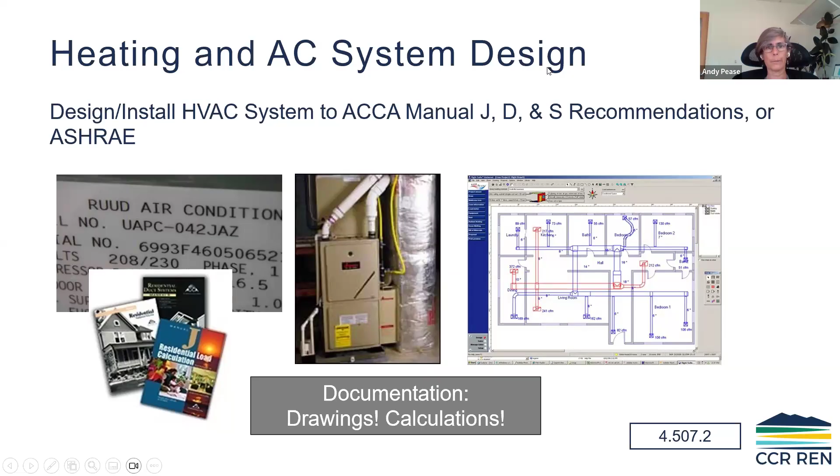Within the indoor air quality setup, we also have requirements that make a lot of sense, like carbon dioxide monitoring. In the current code cycle, CO2 monitoring is required in classrooms—K through 12 under DSA. In the next code cycle, that's been expanded to apply to all university and private school classrooms as well, and any other kind of student meeting space.

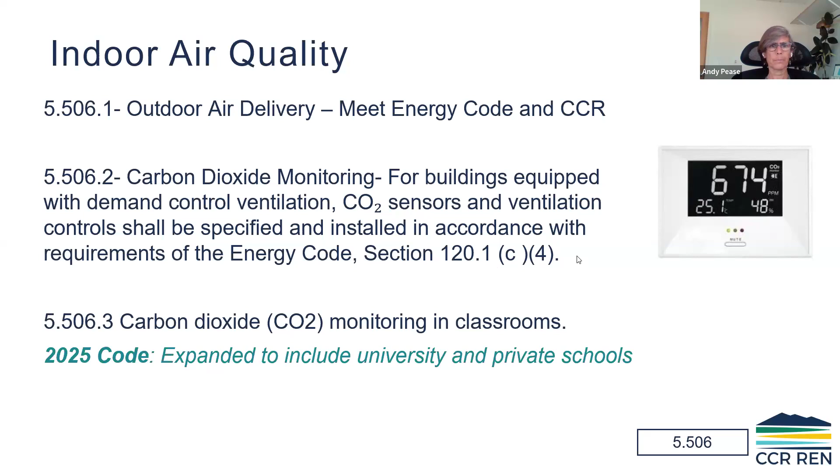Acoustic control came into green building a little bit later, when people started to realize how impactful acoustics are for the health and comfort of the occupants. There's both indoor internal acoustic control as well as exterior.

In terms of interior, multi-tenant spaces require a minimum STC of 40 - that's the sound transmission class. This can be achieved by construction itself, like a double stud wall assembly, or additional materials like insulation or a special acoustic board. This is needed between tenant spaces and between tenant spaces and public spaces, like a central hallway.

Here's an example of a tenant improvement where the first tenant comes in and the second tenant isn't in there yet, but the first tenant needs to make sure they're putting in that STC 40 acoustic isolation sound wall.

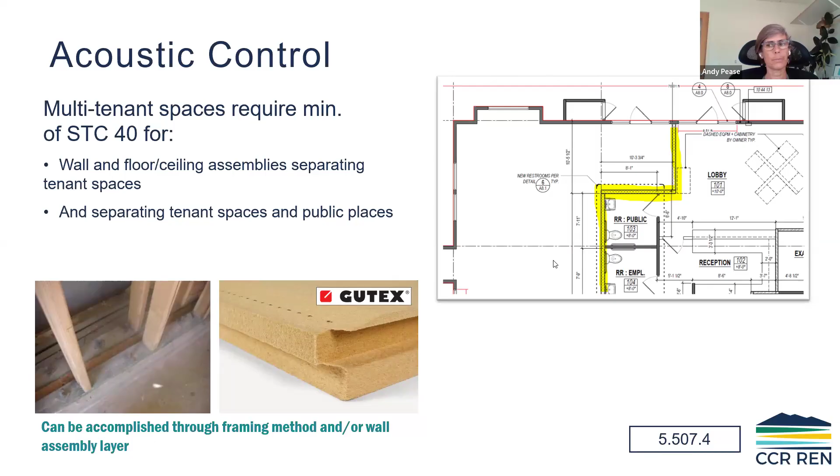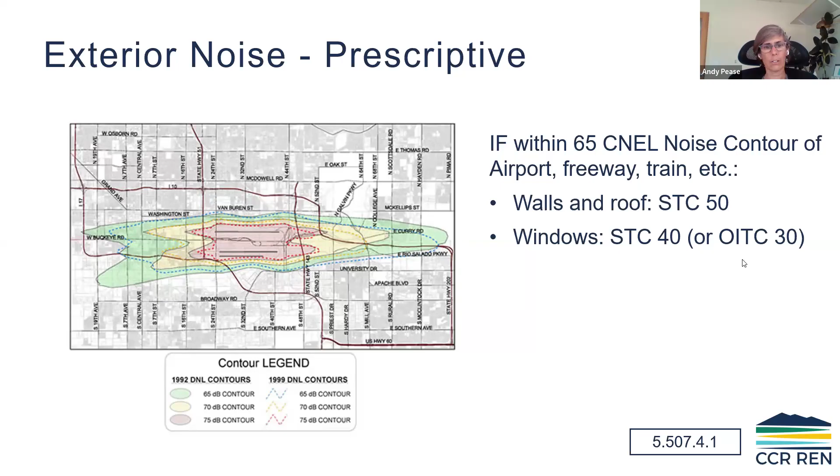On the exterior noise front, if you're in a noise contour line of 65 or more, like near an airport, freeway, or train, you need acoustic isolation that keeps occupants inside comfortable - walls and roof STC 50, and there's also a windows characterization required as a minimum.

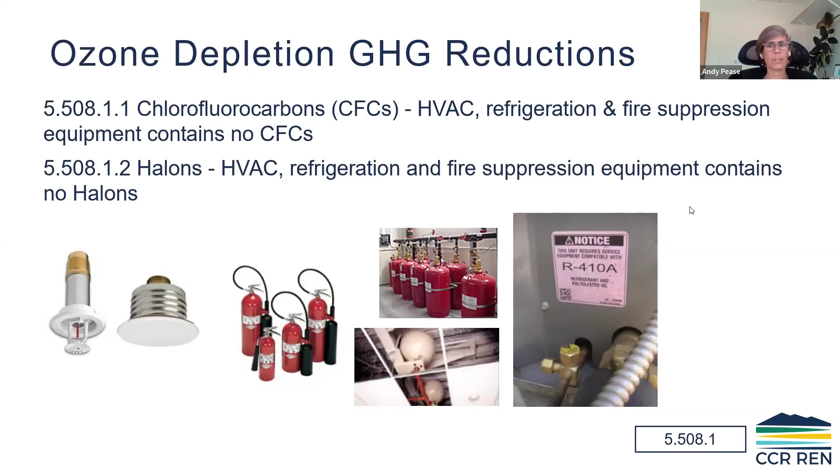Ozone - make sure we don't have ozone, CFC things going on, halons. That's been in the code a long time, I don't see it coming up all the time, but I'm interested in stories from others. This was added last code cycle about supermarkets and refrigeration leak reduction, looking at global warming potential and trying to catch the edges of GWP issues we're having.

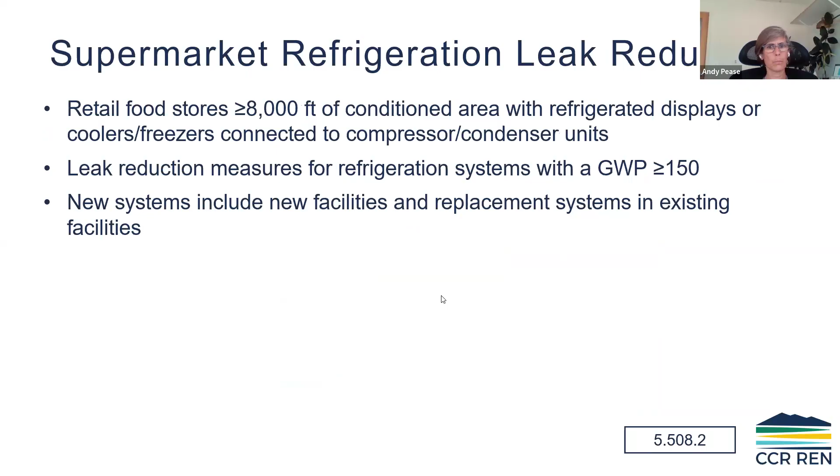All right, we're nearing the end. Any questions? One question: if you have a window in your bathroom, is a fan rule grandfathered in for older homes, or do all bathrooms require a fan? Asking for a friend.

Yeah, it's a great question. Personally, I think those of us who grew up with an operable window - I think it's still a safe way to operate because we open our windows. But what they found was a lot of people didn't, and so bathrooms would get moldy, and so then came the requirement for a bathroom fan.

Nobody's going to come in and make you install one if you're not remodeling that bathroom already. If you are remodeling the bathroom with work that requires a permit, then you will have to install a fan, unless it's a historic designation or has some other exception. Otherwise, if it's new permitted construction, it's going to require a fan.

There are also other options that are interesting in terms of whole house ventilation that might require a smaller fan, because a lot of times now we're using our bathroom fans as part of our whole house ventilation systems with heat recovery ventilation. It gets complicated, but I'm kind of old school - if you're opening your window, I think it's still safe.

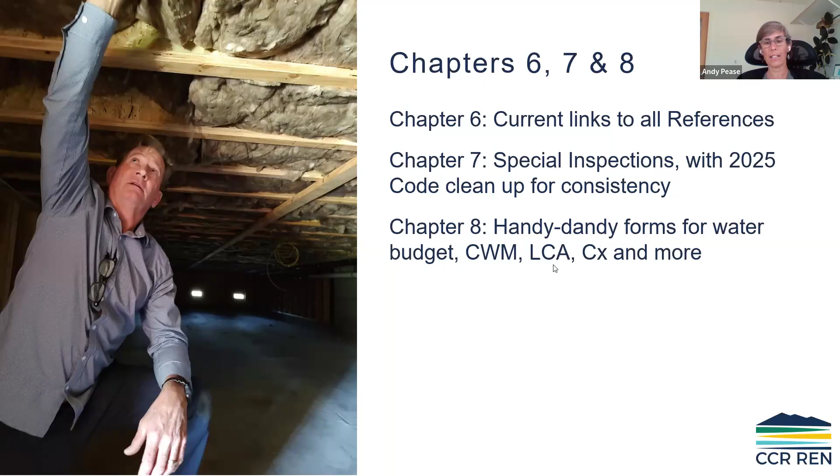Chapter 8 is full of handy dandy forms for your water budget if you want an alternative compliance path, construction waste management, life cycle analysis, commissioning, and that type of thing.

In terms of how tier 1 and tier 2 work, it's almost like a LEED checklist, if you've worked on those - there's prerequisites and then you have some options. So you have to do all the mandatory measures that we've already talked about.

Tier 1 and Tier 2 both add some new mandatory measures, and then you also pick electives. So there's a range of options, either more EV parking spaces, or lower light pollution, or even more categories with low emitting materials. Those types of things are the electives, more chances for embodied carbon reduction or lower thresholds. So that's Tier 1, Tier 2 for residential, how many electives you have to pick.

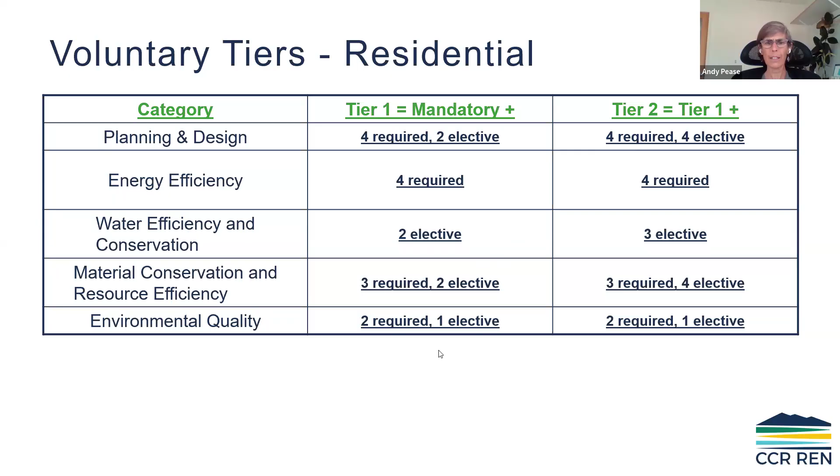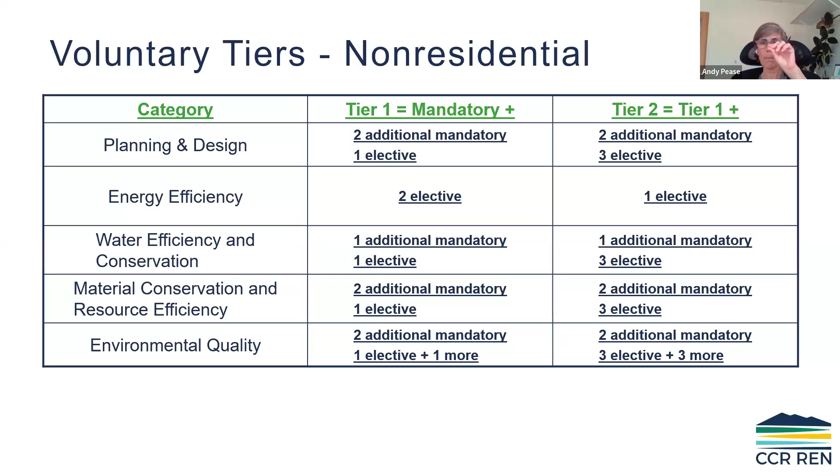And it's a little bit more stringent, or different tiers for the non-residential as well. Some jurisdictions will pick and choose - they'll either say you have to be all Tier 1 for buildings over 10,000 or 25,000 square feet, or all Tier 2, or they might pick and choose a particular elective measure.

Here's an example of one that doesn't show up in any of the mandatory measures, but it does show up as an elective within the Tier 1, Tier 2 options: bird-friendly building design. We're seeing a lot of bird strike deaths for taller buildings that have a whole bunch of glass.

So they're coming up with these specific strategies with visual markers, etched or fritted glass. There's kind of a 2x2 rule - a bird won't typically try to fly through something if it's smaller than 2x2, so having the little spotted grid. You can also put on a pretty pattern, or textured glass like block or channel glass. There's some glazing technologies, kind of iffy if those actually work, or netting, louvers, an extra layer on top.

So that's one of those where it could be an elective measure, and maybe it's just a good building practice, and maybe it'll show up in a future code cycle. A lot of things have graduated from Tier 1, Tier 2 to a mandatory measure, like ceiling tiles used to be a Tier 1, Tier 2 option.